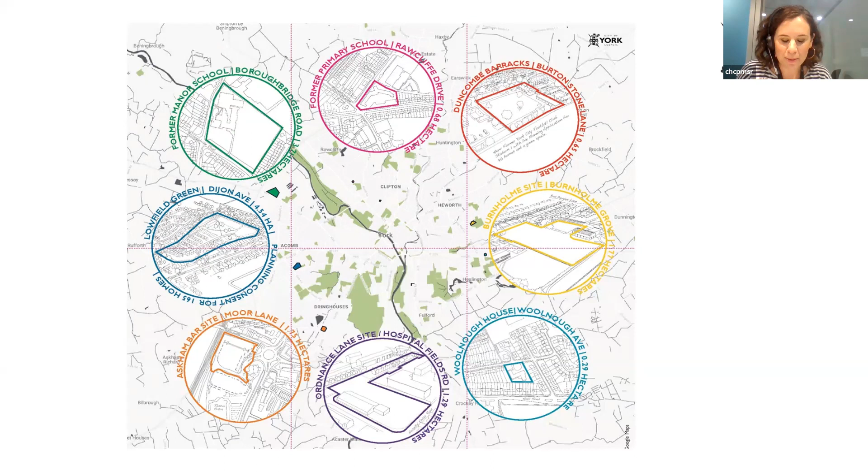So it was cross-subsidy, so 60% outright sale, and that was going to fund the development of slightly more affordable homes, all to building reg standards. So 20% would be social rent and 20% would be shared ownership. And at this point, we had one site with planning permission, which was our Lowfield Green site, along with 7 other identified sites.

You mean, is that for TV? What you mean? I'll ask everybody to mute, please. We're getting some interference here. Thank you. Okay.

Okay, great. So after the local elections in May 2019, there was a real step change in our ambitions. So we've now got a Green Lib Dem coalition. Our exec member for housing is from the Green Party, and working with my team and other organisations, we created the Housing Design Manual, which was our statement of intent for the council and the housing delivery team, and set out 5 key principles.

So delivering the housing our residents need, so building housing that the market wouldn't necessarily deliver, such as multi-generational housing, things like bungalows that are really hard to find on the open market; building healthy homes and neighbourhoods, so for example, really spacious homes designed to national space standards; building creative and distinctive places that bring communities together, so really high quality amenity space and shared spaces; and reducing our impact on the environment and residents' energy bills.

So this is where the certified passive house comes into it, and that was a commitment from the beginning. They would be certified passive house and zero carbon in use. And also supporting sustainable transport choices and connectivity. So it's not just about the buildings themselves, it's about low car parking and everything that comes along with achieving those ambitions. So you can see from our approach, it's very holistic. So we're not trying to just deliver passive house certification, but we're really looking at placemaking to support sustainable communities in the long term.

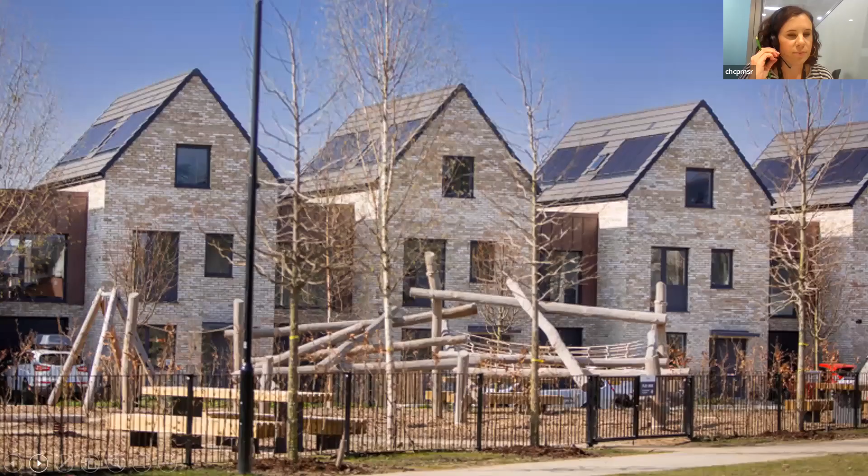So this is our Lowfield Green site. This was designed prior to the low carbon agenda, so I won't talk too much about it. It doesn't have quite the same objectives. We're still very proud of it, and it's nearly complete. So it delivers 165 homes, including 6 self-build plots and a 19-home community build. The project is largely complete now, and we did take steps to try and improve the environmental performance, but it's very hard to do that retrospectively. So very frequently people have said halfway through the build, can't you make it passive house now? Which is a bit too much of a challenge, I think, halfway through.

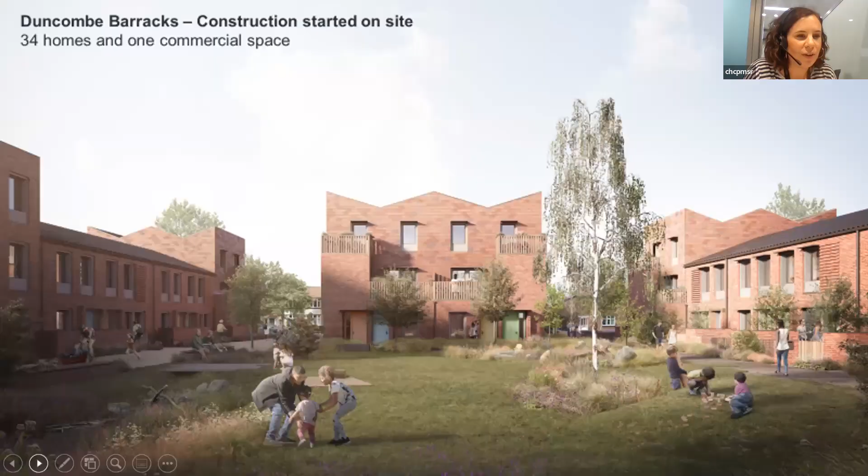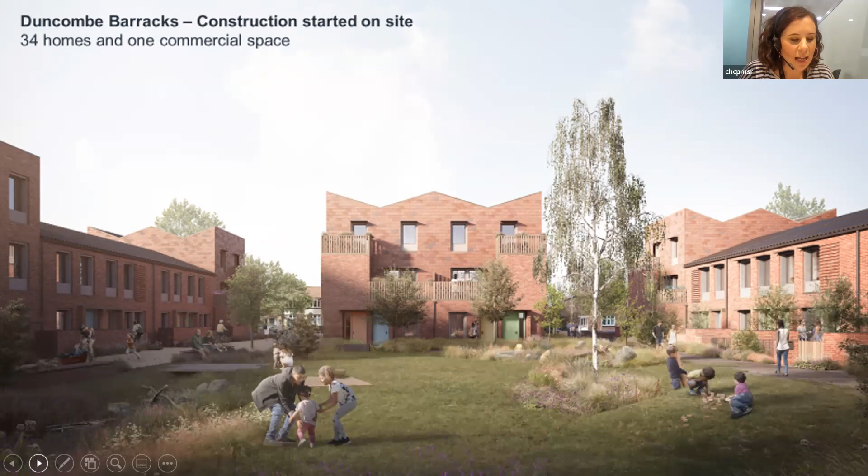Since then, we've developed 3 sites in our second phase, using the design manual as our strategic brief from project inception. Our first passive house projects are Duncombe Barracks, Burnholme and Ordnance Lane. So Duncombe Barracks is the one you can see in front of you. So it's 34 homes and 1 commercial space, and it started on site in July this year with Caddick Construction.

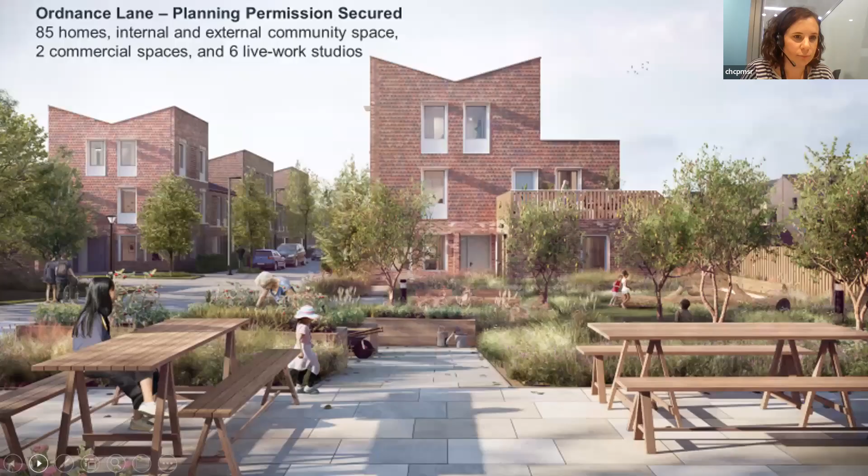And this is Ordnance Lane. So this is 85 homes with additional community space, intergenerational living to combat isolation and loneliness across generations. And it's got commercial spaces to echo the previous industrial use of the site. The site also has retained buildings, so previous military accommodation called the Married Quarters, which will be refurbished to meet the EnerPHit standard, which is currently being priced, and we hope it will start on site next year.

So the new homes on the 3 sites are both zero carbon in use and aim to reduce carbon throughout the construction process. So this approach ensures a whole life approach to reducing their impact on the environment. As most people on this call will probably know, construction accounts for around 40% of the total annual carbon emissions in the UK, and therefore choices such as timber frame construction and recycled content insulation make significant impact on reducing carbon emissions. Typically, our homes have 60% less embodied carbon than a standard new build home.

Embodied carbon is an area we're constantly learning and progressing in, and we monitor it throughout the design and build, and it's a key decision-making tool when we're looking at specifications and products. Currently, one of the things that has raised its head recently is being really careful with the sort of PV that we specify in the renewables. Often the embodied carbon can be very high in those products, we found through monitoring it. And whilst these help to address fuel poverty for the residents, some of the PV panels themselves contain more carbon than they save over the whole life of the product.

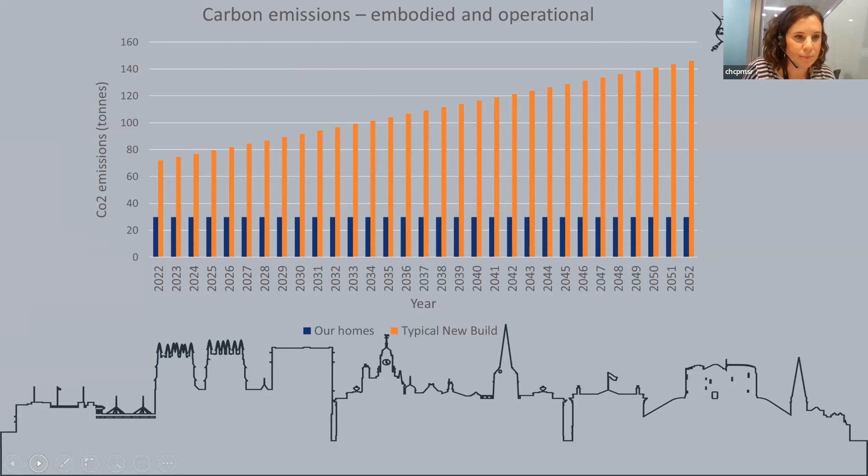The graph shows both the embodied carbon and the operational carbon of our homes in blue and the standard new build in orange, demonstrating the saving over time. To put this into context, an average 50 home project over a 30-year period would result in a carbon saving equivalent of 7 million miles in the car, or 300 times around the world, versus a regular building reg standard development of the same size. And on average, we expect to see a resident reduction in their energy bills of over 75%.

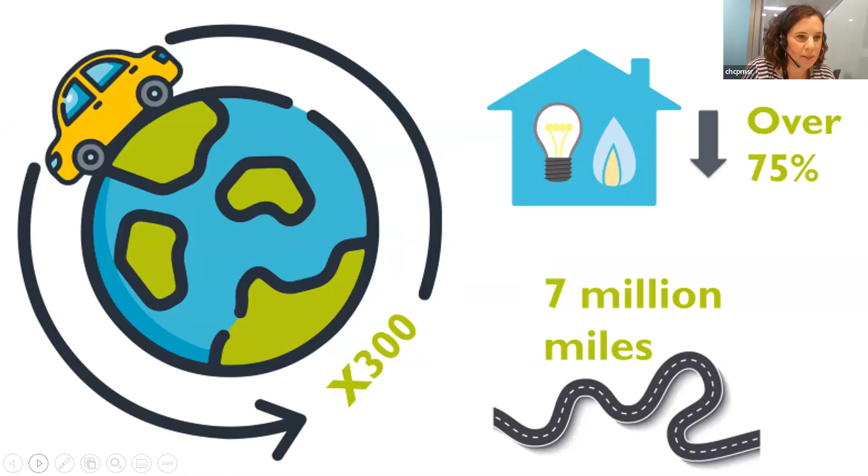So what have been our challenges so far? There's been a few. I'd say viability is a key one. The dramatic change in ambition really impacted our viability model. Before the adoption of the Housing Design Manual, we had quite a straightforward cross-subsidy model where the sales paid off the affordable homes. But since our build costs have increased significantly, this model isn't effective in the way it once was. Some of this can be attributed to the zero carbon Passivhaus ambitions, but also to the other placemaking priorities like high quality materials, spacious public realms. The viability issue isn't just a result of the zero carbon objectives.

Responding to this, we moved to viability appraisal software to interrogate unit types and sizes of properties to understand where we're making money and to maximise this and influence design. We received detailed cost breakdowns at each RIBA stage to allow us to try to carry out value engineering. Value engineering is also quite complex when you've got these objectives to achieve. So-called easy wins that the developer might bring to us, like reducing the amount of PV, would endanger our ability to meet those zero carbon objectives, so were rejected.

We have benefits from developing within the housing revenue account, so we're able to look at our viability in a much longer term. So I think it's worth acknowledging that a council does have some advantages when looking at these types of builds. We can look at our viability over 30, 40 years, and we've got lower than commercial levels of borrowing costs, which also helps us to deliver.

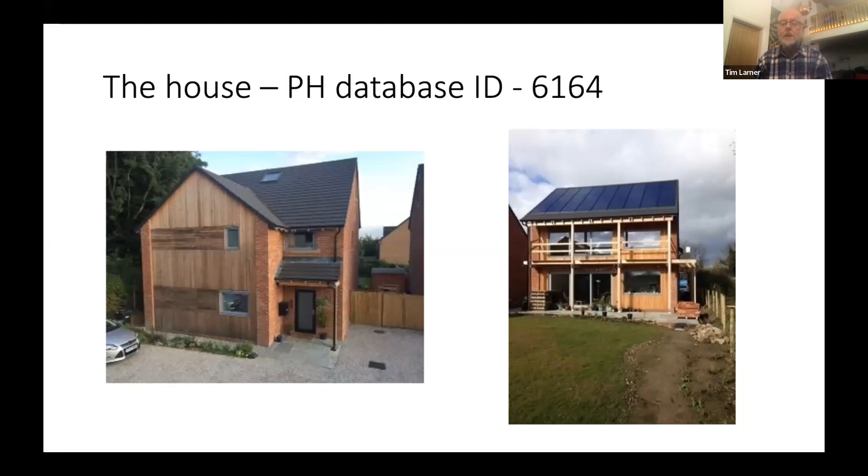So that's our house there, front and back elevations. And if you want more of the detail, it's on the Passivhaus database with an ID of 6164. Just a bit of the background story. We found this plot, two plots in fact, in mid-2016, successfully negotiated and started design in October of that year.

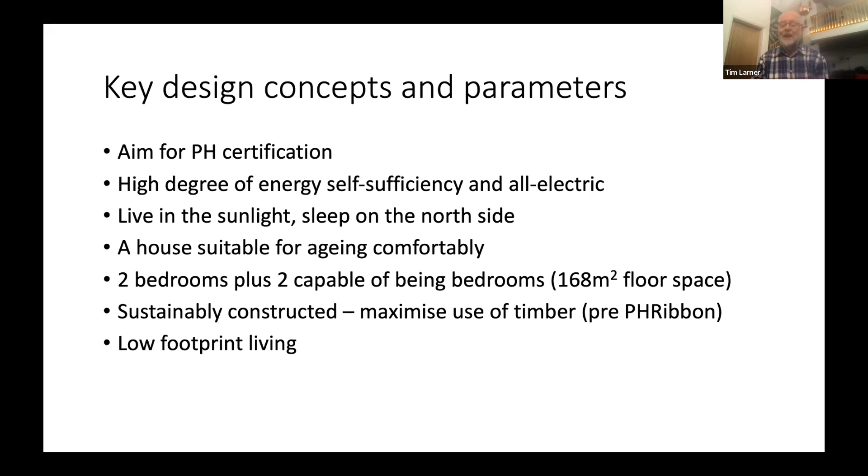We tried to be as sustainable as we could in construction, but we're in the pre-PHRibbon period in doing that. But here's timber frame, and we have tried to maximise the use of timber in the construction. And we really just wanted to be sort of low footprint living generally. So it's a relatively good location for sustainability, although you can rightly criticise me for having 2 people living in a 168 square metre house. I'll put my hand up to that one.

In terms of energy design principles, we wanted to maximise electricity generation, and so we have solar PV covering the whole of the south-facing roof. It is almost due south-facing. It's only about 10 or 15 degrees out from due south. And we pretty early on decided we wanted a house battery so that we could actually get from dusk to dawn most of the year and use electricity that we generated during the hours of daylight. We felt gas was a complete no-no.

When Phil did the initial Passive House Planning Package runs, there really didn't seem to be a heat pump small enough for the house. It only needed 1.5 kilowatts to heat it when it was freezing outside.

Phil sought to lead us down the MVHR post heater route, and we were perhaps not so enthusiastic on that. Having been dogged users of Economy 7 tariffs in the past, and thinking that the market was moving towards more time differentiated electricity tariffs, we felt that we could use a lot of our electricity in off-peak periods when it was cheap, use the thermal mass of the house to the full, and put money into simple controls whereby we could control the energy use and the time at which we drew energy.

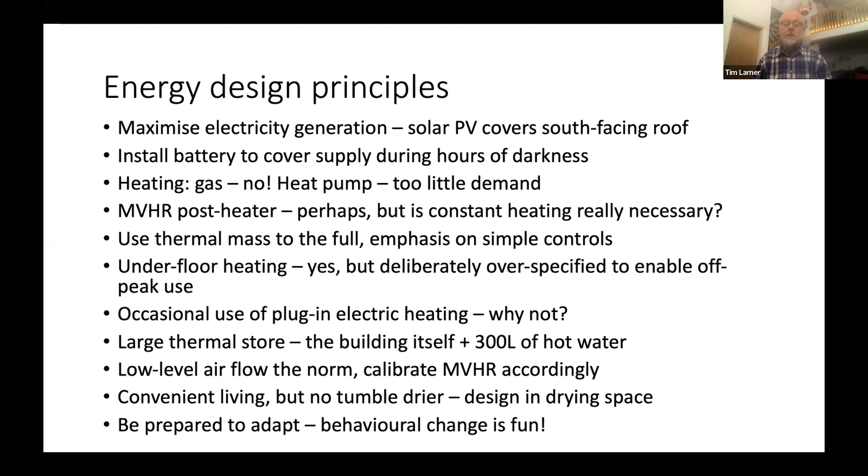And I think the message of all of this is, if you live in a passive house, then be prepared to adapt, and that behavioural change is quite a lot of fun. It's not necessarily a challenge, but because we were involved in the design and the specification, we understood in broad terms the beastie we were getting when we moved in. But as you'll see later, it's taken us quite a while to actually learn how to use it.

Tim, you've got about 5 minutes more to speak. Thank you.

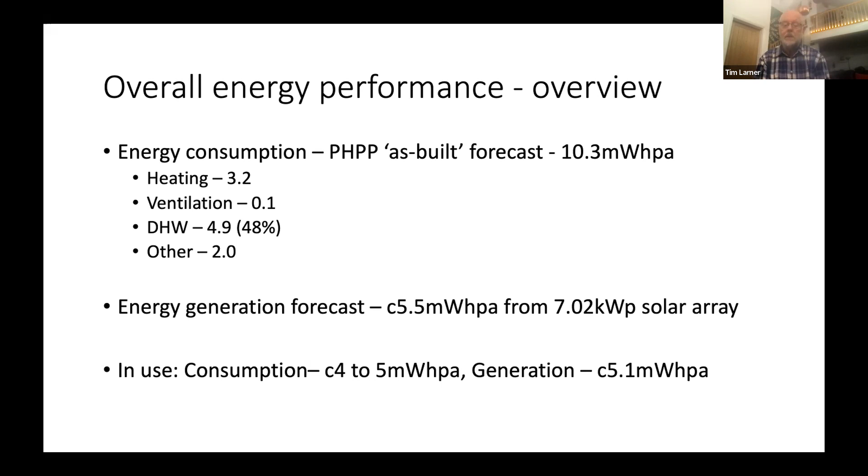PHPP said that we would need 10.3 megawatt hours per annum of energy, split according to those figures, notably with a very large chunk, nearly half, for hot water, and that we would produce about half of that from our roof, from our 7 kilowatt peak solar PV panels. In use, quite a different story. We are only using 5 megawatt hours per annum, and slightly less from our solar panel array than was predicted, but I think the specification of the inverter is probably responsible for that. Very difficult to know without sub-metering what we're using on what.

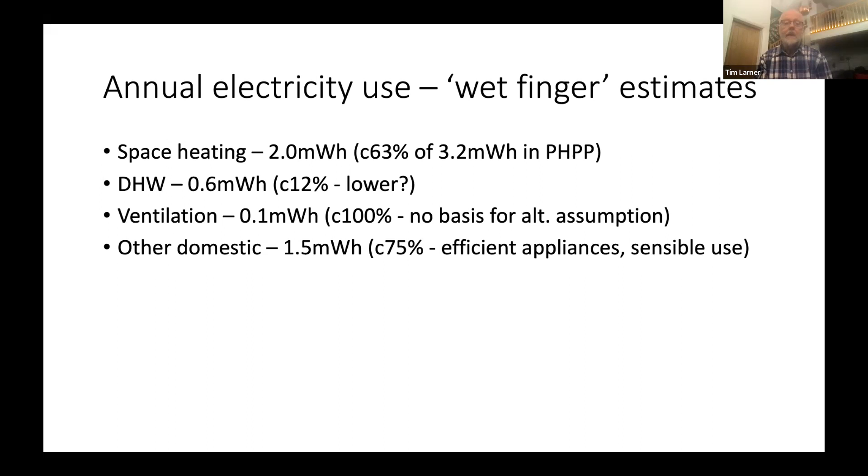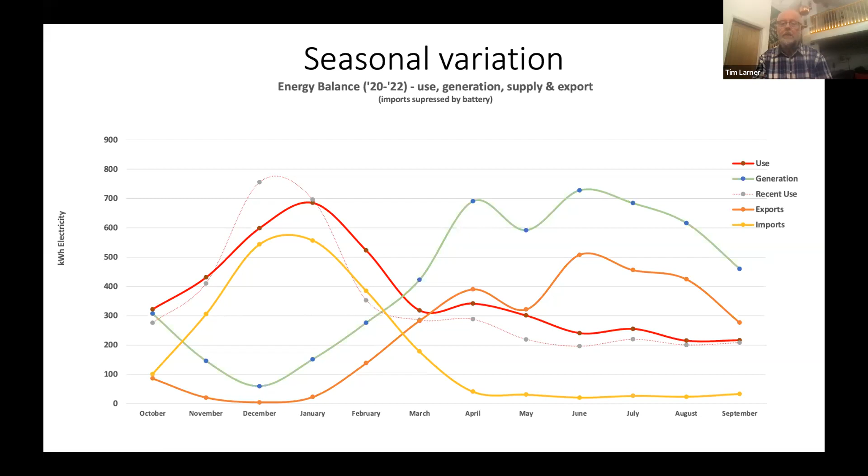That's my best guess as to where that 5 megawatt hours is being used, but I would not want to be quoted on that; it's an attempt to show where we're using less. I can talk more about seasonal variations in use and export of electricity, but as you can see, massive seasonal imbalances, so no hope of being off grid, because we need masses of electricity in the winter and we send a lot out in the summer, when we barely use any grid electricity. I'll come back to that if people are interested.

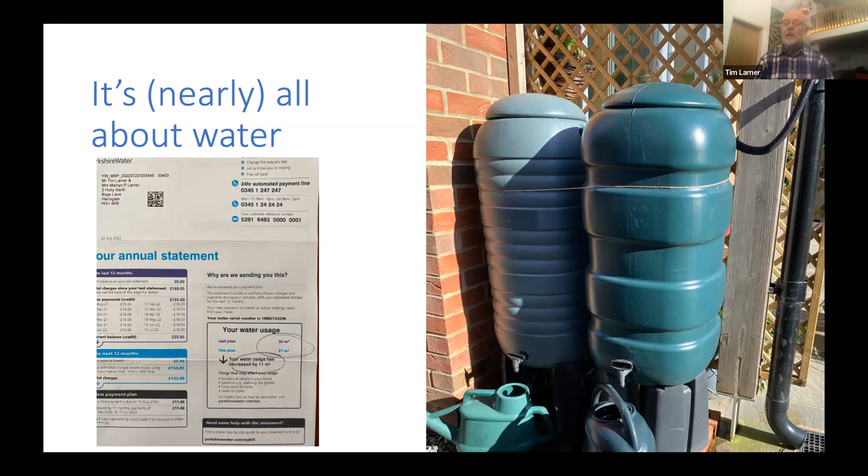So back to the water. It really is nearly all about water. That's our very sophisticated water recycling system. So little water used outside the house. And if you've got good eyesight, you can see that Yorkshire Water think that we'll use only 2/3 as much water next year as we did last year.

Heating it is very important, and there's a lot of things I could say about heating hot water, how it's done, how hot you want your water, issues of plumbing specification and design. Again, too much to go into now, but I can come back to that. And remember, we were predicted to use 4.9 megawatt hours, and I think we're at about 0.6 megawatt hours. That's a massive, massive reduction from what was predicted by PHPP.

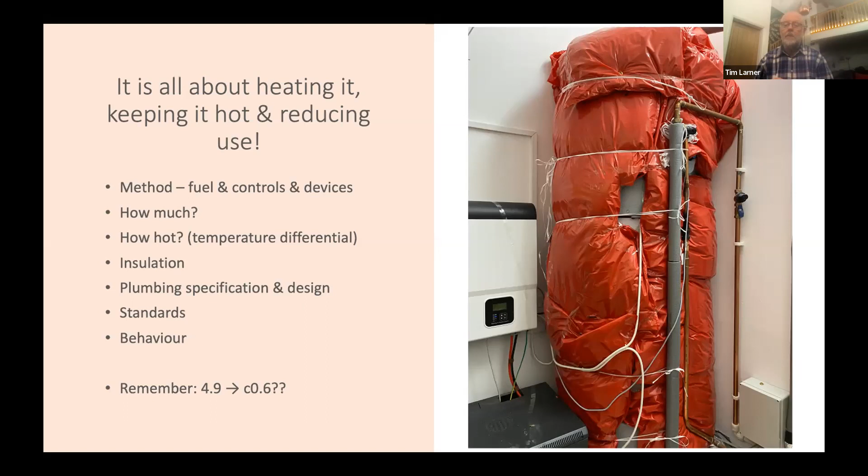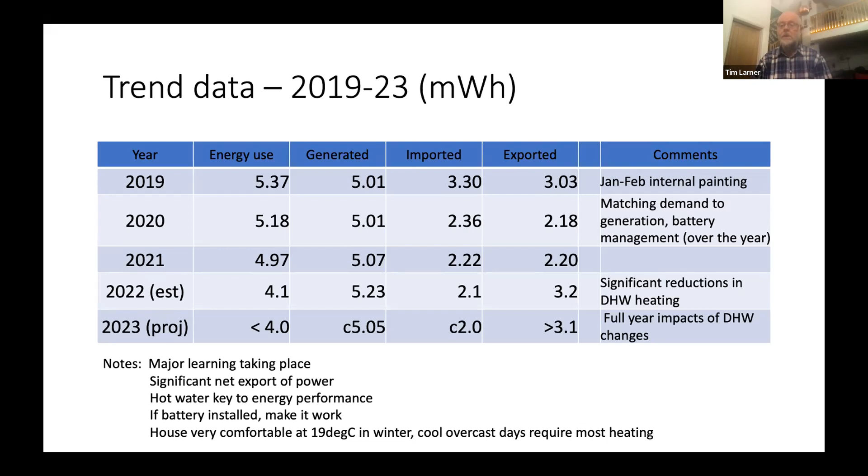Takeaway lessons, well, I think understanding your client is so important, educating them through the process of design, involving them in decisions, and energy design is, as we've already heard, more and more important with the higher price of energy. Managing those interfaces between the architectural design, the renewable design, and particularly plumbing contractors and electrical contractors to a degree, is absolutely vital to get the desired result.

So just a few concluding remarks there. Is it all about energy? Well, I'm still not sure it is all about energy. I think it is about comfort and about quality. But perhaps it should be more about energy as people get a heightened perception of how much household energy is costing. Energy is not the same as carbon, but they're obviously very closely related. And with regard to electricity, we're on a fast moving path towards zero carbon electricity. Definitely need to consider both design and in-use issues. This is not an either or.

Did we get it completely right? No, I don't think we did, and I'll tell you about the problems if you want to hear more about those, but generally we are exceptionally pleased. And I think operational carbon we found quite easy to get to zero and negative operational carbon. Embodied carbon, less so. Phil and I collaborated on a PHribbon run post the house being commissioned. It's a great start, but my feeling is there's some way to go in terms of really understanding the amount of embodied carbon.

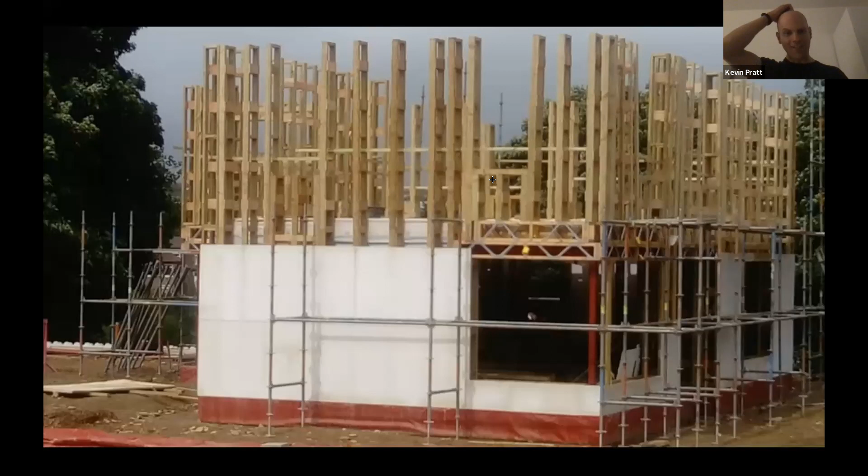So we started out on an old derelict site, a little bit tongue-in-cheek, a little bit like the industry: a bit derelict, a bit out of date, and needs an update and a revamp. So we used a stick build system, the Beattie Passive system. The reason for that is it gave us good access. It was down an old country lane. An old lady lived there previously, and she'd been deceased for 15 years when we went in and had to take down the original building. There were trees coming up through the building. So that was interesting, seeing it turn from an old derelict building to something quite beautiful, quite stunning.

So the stick build system, we found it very simple and easy to apply, given the logistics of the site. We had some good training and some good support from John Blowers, who worked with Beattie Passive and is now part of the team. We were really pleased, really excited when we managed to get ourselves to a 0.4 air changes score. And I remember the dread when they came and used the eco bead: we had it all airtight, and they came in with like a wood cutter and just started puncturing holes in the membrane. I was like, no, don't do that. But we managed to overcome the trauma and get back to airtighting.

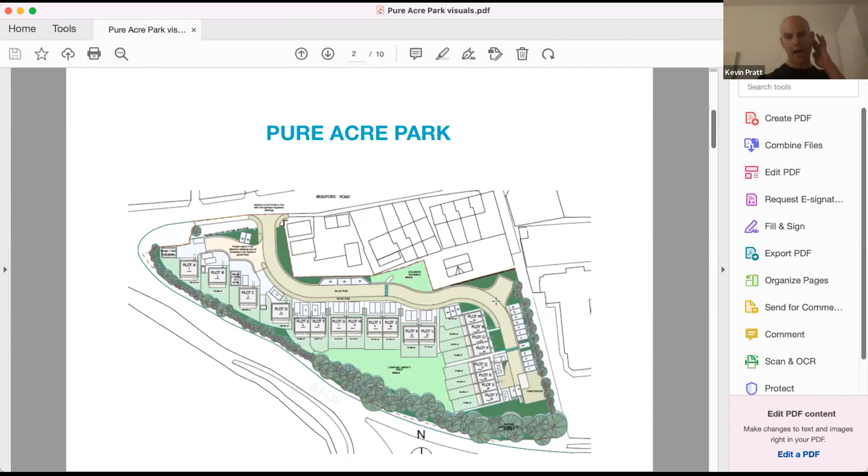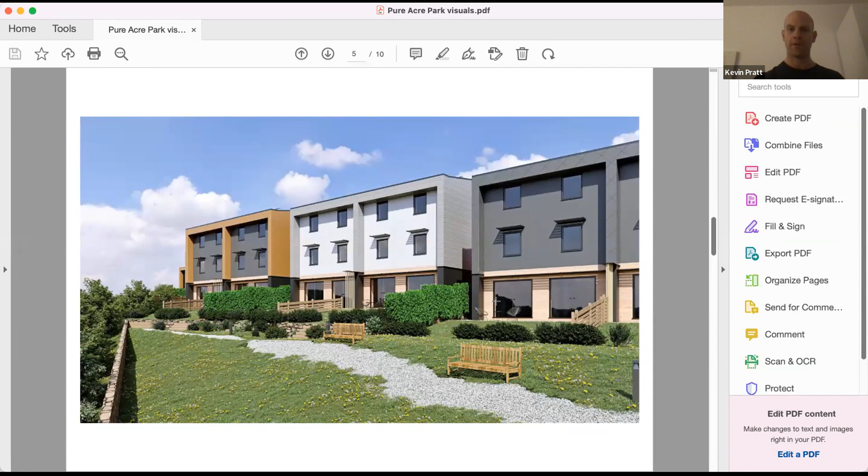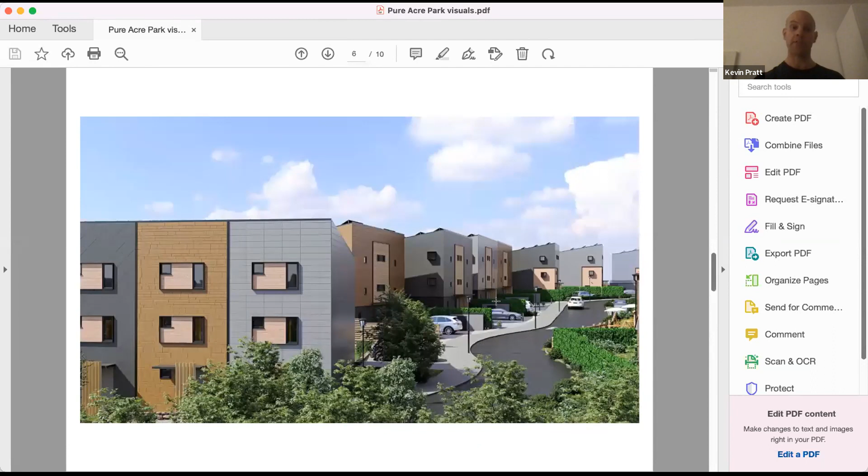So this is our new development. They are only CGIs, just in design phase. So we're looking to achieve a much better standard than what we've done, and you can see the design there. The north facing side, very small windows, versus the south facing, very large windows. So yeah, really excited about delivering this. And what we've done now is we've set up a Zero Carbon Workshop, where we're producing timber frame panelized cassette systems.

So yeah, we've really embraced this idea of improving, and the off-site construction really brought it home to us just how much waste happens on site. So actually getting an off-site manufacturing facility is highly favorable in terms of reducing carbon emissions. But one of the things that we're looking to move on to now is creating a little bit of a think tank where we're bringing in people who've got experience to share knowledge, and this is the sort of thing we're doing here. So we'd really celebrate what's happening here, and we're happy to engage with people, talking to them about their experiences.

And obviously the big challenge is retrofit. That's the tricky one. That's the one that's hard, or harder, I would say. I think it's a challenge that can be met. You've got basic principles that help you to navigate through uncharted territories, so to speak. I know there's a lot of people here with experience from retrofit, and it's been happening for a long time.

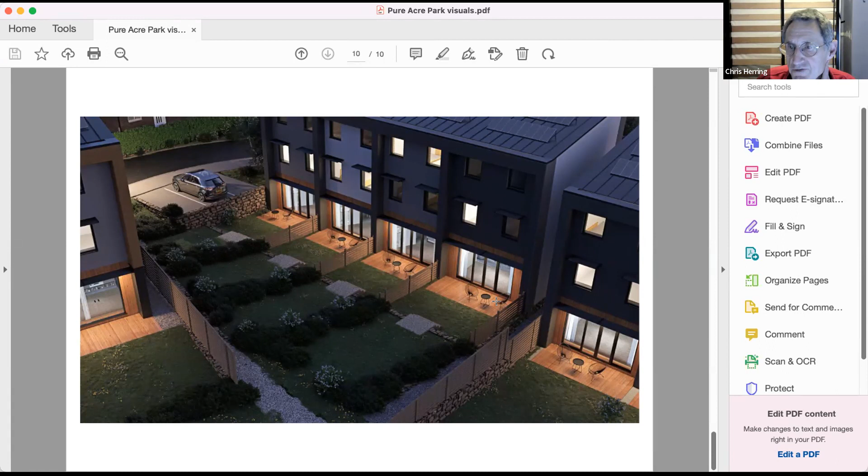Okay, thank you, Kevin. I'm going to just grab a couple, we've got a couple of minutes for questions. I think the interesting one, perhaps for you as well, is how do we increase consumer demand? Obviously we'd probably all like to see Passivhaus as the building regulations standard, but we're not there. So how do we increase consumer demand to drive up Passivhaus builds, especially with the larger volume house builders? You've moved on a long way with the new plans in terms of the scale you're doing, but the volume, what's your feeling about all of that?

Yeah, well, I spoke to a lot of people who were really interested in the homes that we built, and I've got a real sense for it. And I do feel like people have got an appetite for something different. You can say that those are innovators or early adopters, but I do think the early adopters are coming. I'm always an optimist, but I'm seeing the changes at government level. I'm seeing the changes, for example, us going into colleges and educating people.

It's an education. You said this, Chris, educate and supply model. People need to know what they're buying. So if you can tell them that you're actually going to reduce your bills, that's a big, big thing, especially in today's energy crisis. So I really do believe it's coming. I think it's just a matter of time.

Yeah, interesting. I'm going to go off piste and just ask you, what would be your one message for small developers? Because you're not as small as you were, you've scaled up a long way, but nevertheless, modest-sized developers. What's your key lesson for them?